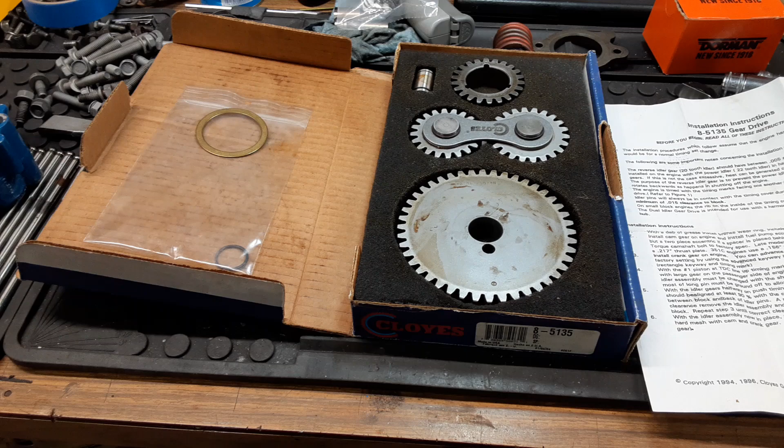Working here now on the Ford 302 60-over Junkyard Dawg engine, and the next thing I'm going to do here is put on the gear drive.

So a lot of you new guys out there, when I say new guys, I'm talking about people who haven't been around this kind of stuff much. This is kind of the cool thing that was done back in the 60s, 70s, maybe even 80s, late 80s, early 90s. It's been proven now so many times, on the dyno, that these things will soak up your horsepower. I wouldn't necessarily say by a lot, but it doesn't help. Let's put it that way.

They're noisy and annoying, and just all the bad and wrong reasons really why you shouldn't put it on. However, I like pissing people off. I like noisy, I like mechanical, I like sounding like I've got a big old supercharger under the hood, a Whipple charger or whatever. That's what I like. And I've been around cars with these. I don't know if you have. I mean, I hardly see it anymore at all.

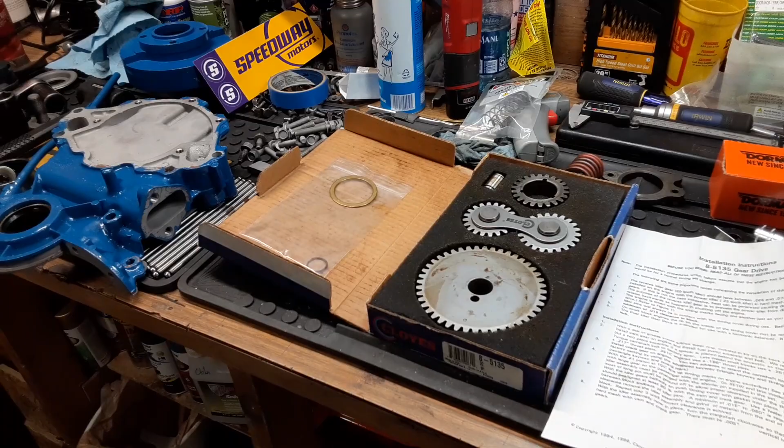Every car show I go to, I don't think I've heard a gear drive for a very long time. Now, the other issue you may or may not know is that these things create vibration, and when you use it on today's modern vehicles, or you're putting fuel injection on here, like I'm going to do eventually, but not when I first start this up — it's going to have a carburetor. The knock sensor, you can really screw it up to where it'll throw out a bunch of retarded timing. It's going to try to retard the timing on your fully computer-controlled electronic ignition system, just because of the fact that you've got a lot of vibration and, quote, knocking happening in your engine, when in fact it's just nothing but a really noisy drive gear.

So anyway, I've had this set for over 20 some years, just lying around. I've always wanted to put it in something because, again, it sounds intimidating. It's your personal preference, but for me, it's cool as shit. I mean it's really freaking cool. That's all I can say. I'm half deaf already, so the fact that I can hear the engine just kind of whining and whirring is really cool.

Now, I'll fully admit though that if and when this engine should stay in the car long enough to actually get the fuel injection swapped over, well then I'm going to put on my true roller, double roller timing chain set. I'm going to put that on there. But for now, because I'm going to drop a carburetor on it, I'm going to drop in a distributor that has an igniter on it, and it'll just basically be straight timing based upon where you turn the distributor, etc.

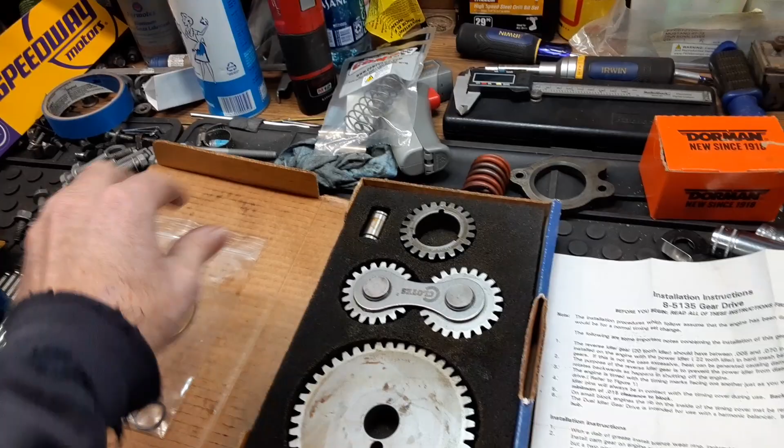Anyway, let's start talking about this. So this video, the intent and purpose is to show you how I'm putting it on this Ford 302, which, by the way, is a C8 block, so a 1968 block, with a 302 crank in it. I'm going to show you how I'm doing it on mine. I'm going to explain a little bit of the unboxing of the actual gear set itself. You won't be able to hear this until I actually get the car started, so if you came here for the noise, I'm sorry, this isn't the video.

But I am going to show you, because I see so many videos out there for small block Chevy, and maybe we can finally make one for small block Ford, so people can actually see how to, and what will happen when it actually fires up and starts and runs, which we hope it will do. So for now...

Let's talk about this. This is a Cloyes timing set, as you can see here on the box. The gear drive, billet steel, heat treated, 3 keyway. The part number is 8-5135. I actually did go to Cloyes' website, they still list it there, but Summit Racing doesn't have it in stock, and it says not available. So I don't know if they quit making it or what, but nonetheless, I have a set here.

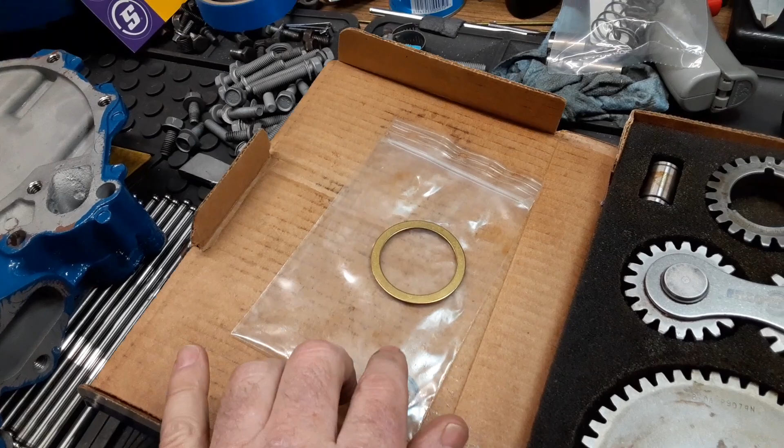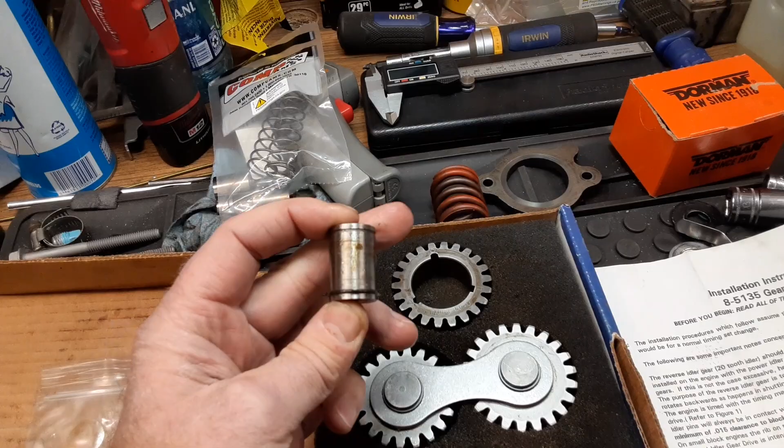So when you open it up, here's a one-page set of instructions that was folded up, and inside this bag, this spring retainer was and still is inside the bag. The bronze thrust washer was inside the bag too, I've taken it out. This is an axle, basically a replacement axle, because you have a choice.

I don't know if you can quite see it with the camera. Yeah, you can see - this is the short axle, and this is the long axle right here. This was over here when I got this set and opened it up for the first time. I've already done a little bit of mocking up and put it on, so that when it's time to do the video I don't have to stop and wait so long. But anyway, the point is that I put the long axle in already.

So about this system, it has a 3-keyed crank gear, and it's really cool because the straight up or 0 timing is the circle, and if you notice the keyway is actually rounded like a circle. The retarded one is the rectangle, and again the keyway is squared off. The advance is the triangle, and as you can see it has a tippy-top looking roof, a triangle point for the keyway. That's really cool, actually. So that is the gear there, the crank gear.

This is your actual gear that transfers between the two. Now, as I said, I had to replace this axle from the short to the long in my situation. This is actually the drive gear right here, the bigger one. The smaller one is basically the kickoff gear, is what I call it, because when the engine is running, this larger drive gear is doing all the work, and when you shut the engine off, sometimes it will back up just a little bit, kind of a kickback, and it will try to throw this drive gear out.

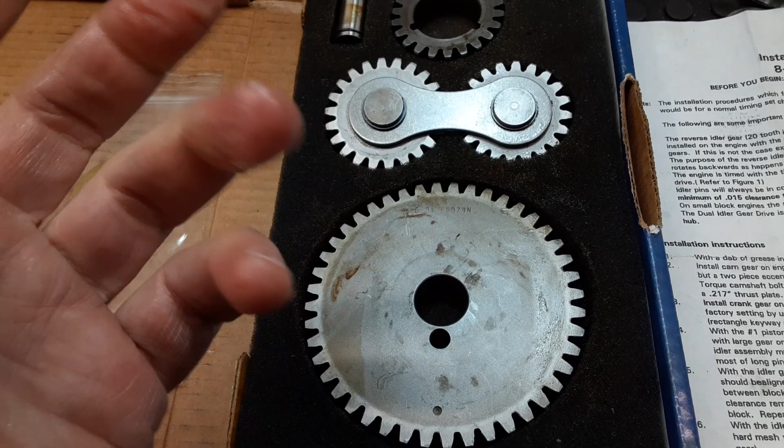Then you have the upper gear, which is very, very simple and straightforward. It has a hole for the dowel and a hole for the cam, that's really all there is to it. There is the dot right there, so the circular dot would line up with the circular crank for straight up, and then you can line that up with the triangle for advance or the rectangle for retard. And it will advance or retard 2 degrees according to this.

Now, I'm not going to do it in this video, but when I get this all together I am actually going to degree the camshaft and make sure that it's close to where it's supposed to be. By the way, in my case this camshaft happens to be a Summit 1790 grind, part number rather. So that's the flat tappet hydraulic - that's what I'm using in this situation.

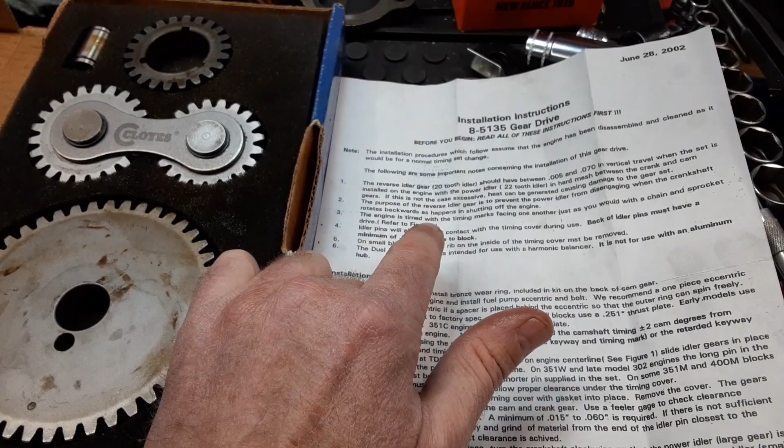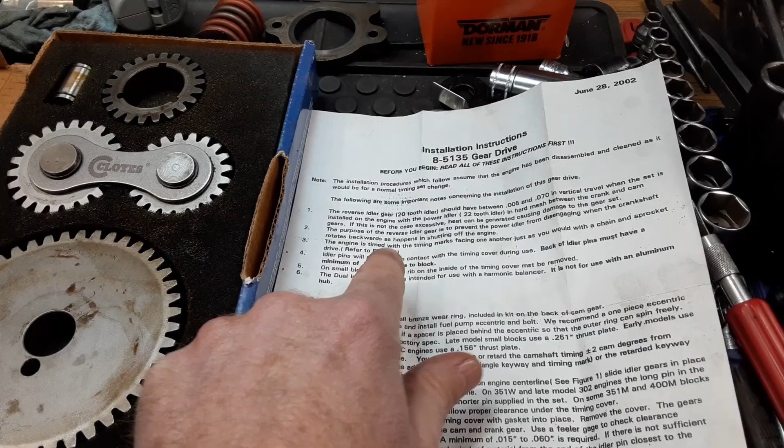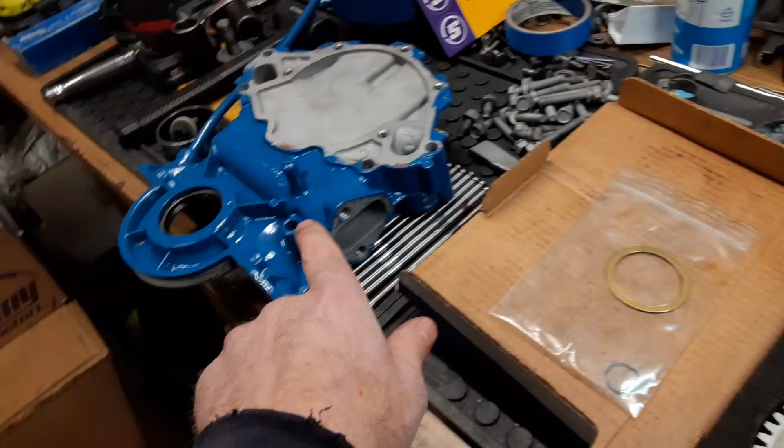Let's see what else - there's instructions in here telling you which one is the idler, which one is the power gear, telling you the purpose, as I just explained. It tells you how to time it as far as how to use the marks. It tells you the minimum clearance that it will need between the pins and the block, which I'll explain here in just a little bit. It tells you what you got to do to the timing cover, which I'm going to show you in just a minute.

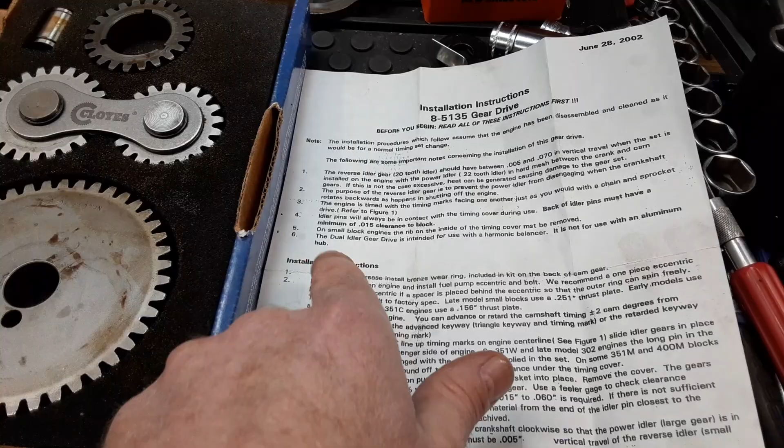It's saying here on the last one, it's intended for use for a harmonic balancer, not for an aluminum hub, which most people probably aren't going to be using unless you're in some sort of high performance racing. So anyway, that's what's going on there.

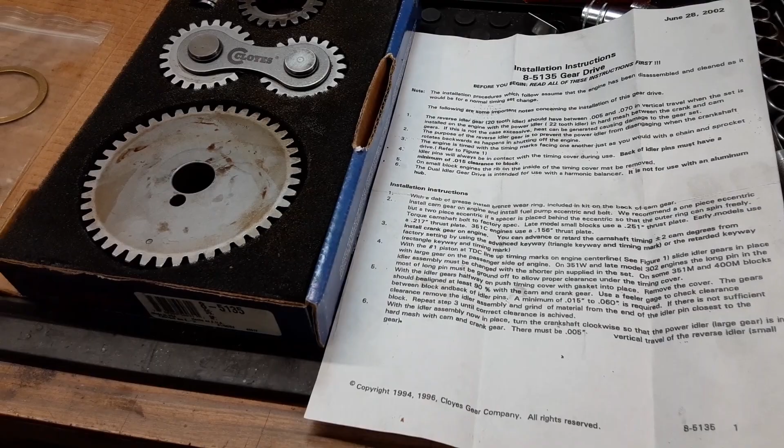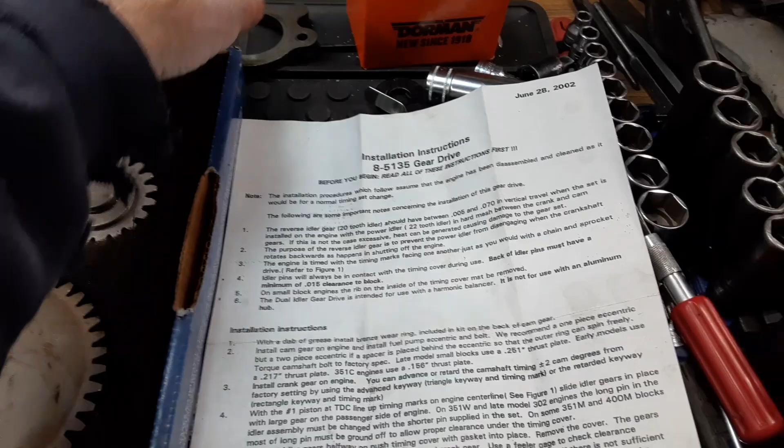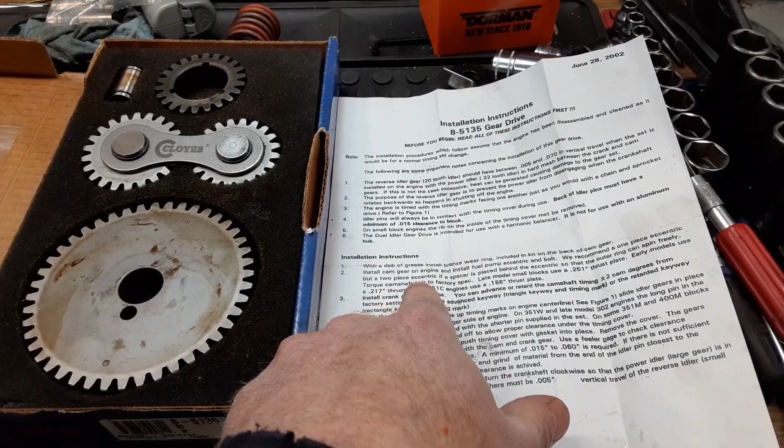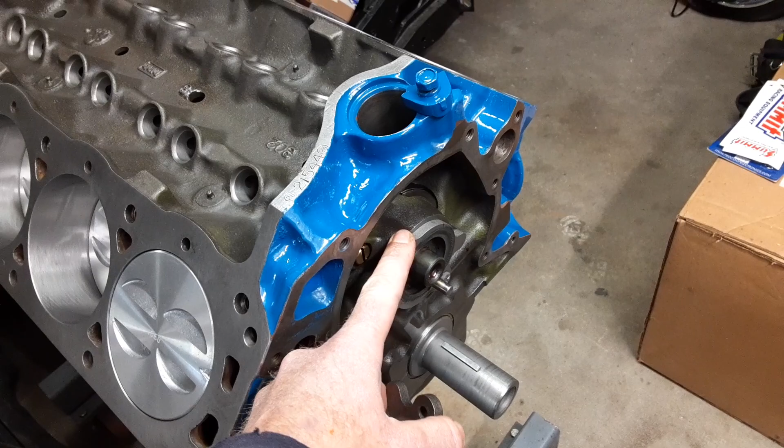Then you have the actual installation instructions, and it tells you this thing will fit on a 351 Cleveland, 351 Windsor, 260, 221, 289, 302, and so on. It's telling you that the thrust plate, the cam thrust plate on a small block Ford, is a certain thickness. The early models are 0.217, the 351Cs are 0.156. In my case, they are 0.251-ish, approximately. This is a good example of one that was used.

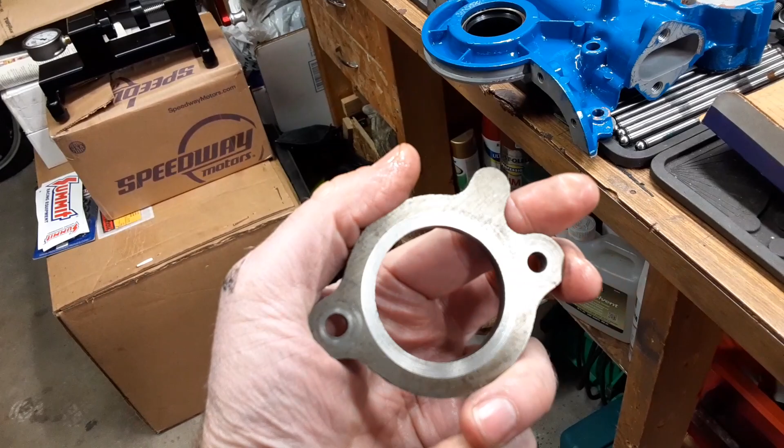You can see that this says bottom and back, so that means it would have been sitting like this against the camshaft, and you can see that it just barely wears a little bit, at least in this particular engine. You can actually see the wear was all happening on the front, where the timing chain was bumping up against this thrust plate. So that is one of the reasons, I assume, why they want you to use this bronze thrust plate, because according to the history we can see here, it's going to rub on the front more than on the back.

Okay, so what I'm going to do is stop the camera here and go piece by piece as we put it back together.

One thing I can do, and by the way, this is in my opinion a lot easier to install than a fresh roller chain type thing, because it just seems to slide right on much easier. I had to tap this on just a little bit, but it was pretty easy, and especially a lot easier for lining up.

So this one here is simple enough, I can do this right now. I'm going to go straight up, which is right there, the nice rounded keyway with a 0, and we'll just slide that right on. Look at that, it just slides right on. There's nothing to that at all.

The next thing we're going to do is put this thrust bronze washer bearing, whatever you want to call it, on the back of this. You can see I already have a little bit of moly grease there, which is what they say to use, a little bit of moly grease, and then we can put that on there. Now I'm going to have to do this with two hands, so I'm going to pause the camera and come back.

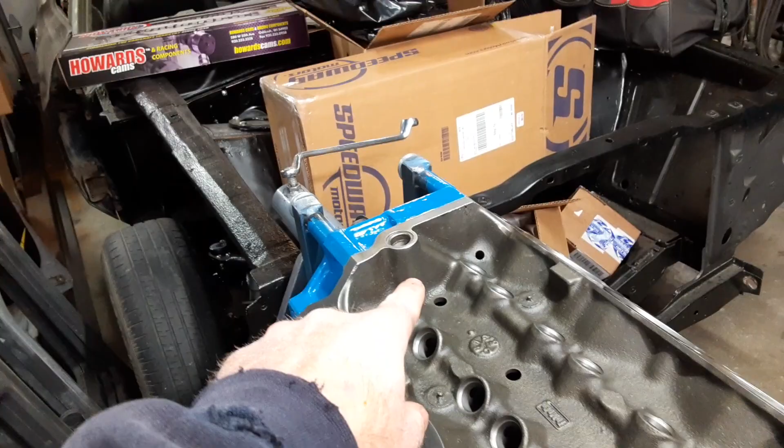Okay, we're back. You can see that I slid the gear on, and like I said, I put some moly lube onto that bronze thrust washer, placed it on there. Then I come over here and put this on. I had to use two hands because I don't have the plug in the back by the cam. I can push the cam basically right out of the back of the block, so I don't want to do that, so I had to hold my hand back there to install this. Okay, so I've got that set in place now.

Let's talk real quick about the fuel pump eccentric. That's what we want to talk about.

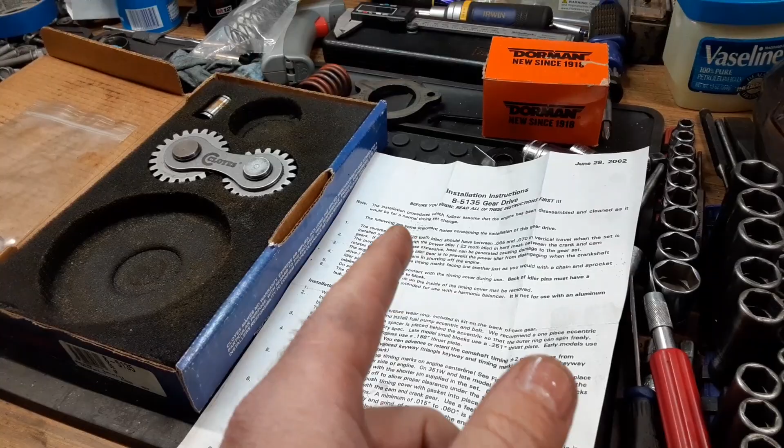Now they're saying in here that they recommend the old-fashioned solid one-piece steel fuel pump eccentric, which I actually do have, so that's not going to be a problem in my case. It says you can use the traditional two-piece or the later style two-piece, but they say you need to make sure you use a spacer on there, so that the inner portion does not clamp against the outer portion to where it becomes basically one piece. You want that outer piece to actually just float around, so to speak.

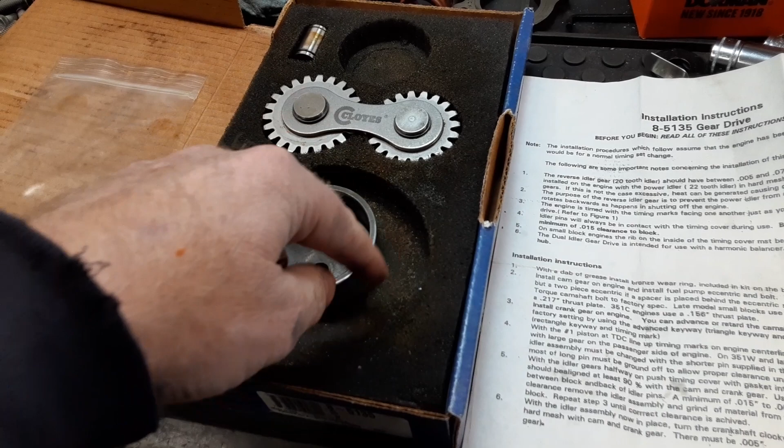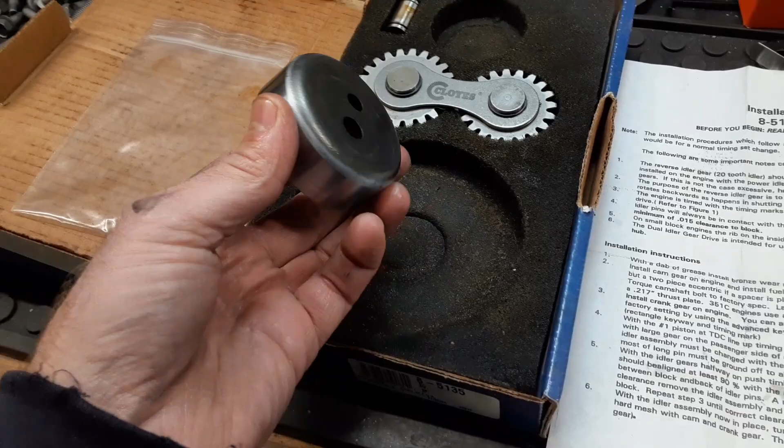You can actually see a little bit of wear was taking place on this, but you can't feel that with your finger or whatnot. But anyway, this is what I actually have, this is what I'm going to use. If I had a two-piece, I would definitely use it, and I would definitely do it the way they say, get some sort of spacer or washer back there, so that when it's all clamped down and tight, the outer ring can kind of flop around and free float properly, okay? Otherwise you just basically have a one piece, and what would be the purpose of that, right?

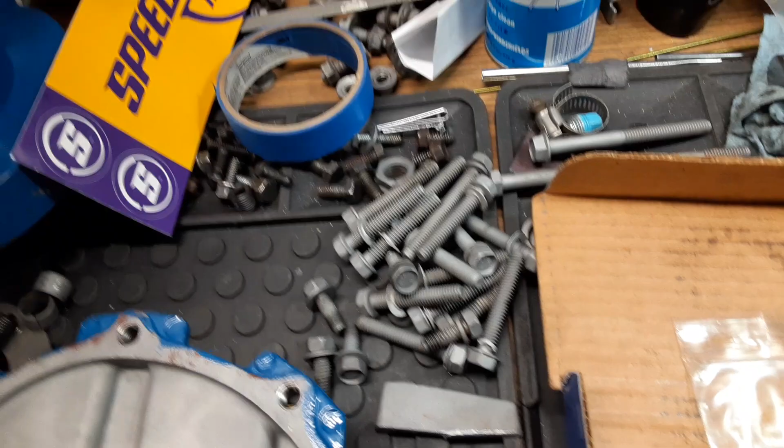Now what we need to do is take the cam nut, or a bolt rather, stick it inside there, get this lined up. I'm going to be using... let's see, which one is it? Nope, not this one, I'm knocking everything over here. This is why I can't wait to get all this stuff done so I can clean this place up once and for all. Taking too much time here.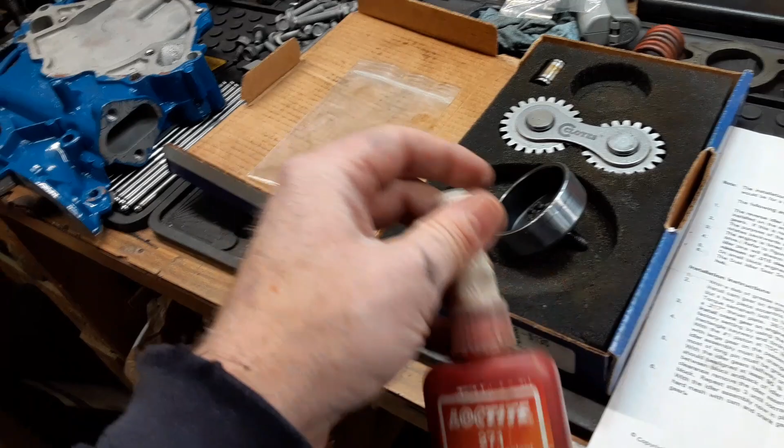Alright, I'm going to use the Loctite 271, put a little bit of that on the threads because I don't want that ever coming loose. Of course you're going to torque it properly, but that's what I use. There's varying opinions about whether you should use Loctite or not. That's what I've always used, I've never had a problem, and when I go to take the cams apart later, if I ever do, no problem. So that's what I'm going to use. I'm going to stop the camera now and perform that function, and we'll be talking again.

Okay, we're back. Let's talk about what I just did here. I used the Loctite 271, put a little bit on the threads there, and screwed this down in there.

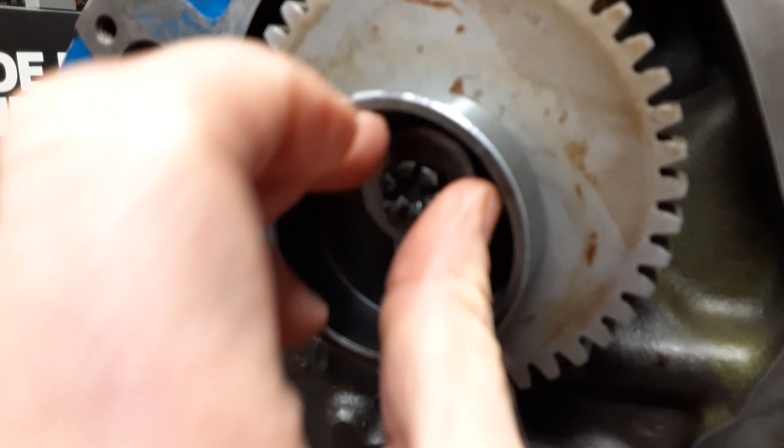Now, one thing I'm going to talk about that I didn't before I started: the fuel pump's going to be located over here, sticking its arm over here like so. This thing's going to be rolling around and pushing on it. When you get this close to being tight, just starting to snug up a little bit, there's enough slack in here that you can rock this thing back and forth surprisingly far - 3/16 in my application here. This thing will slop back and forth.

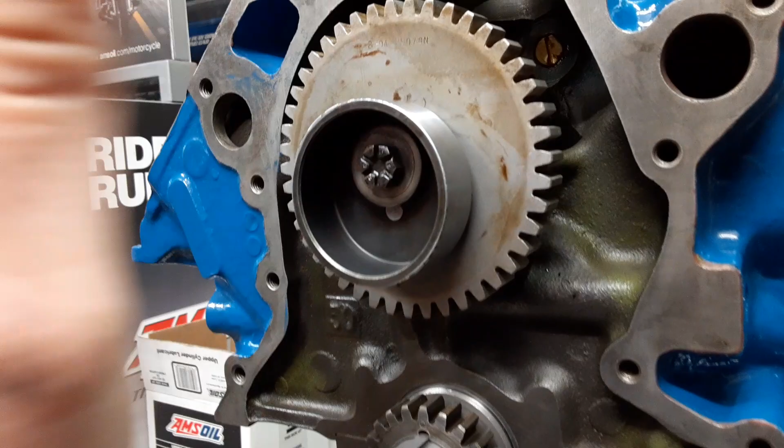So what I did was I rocked this thing tight up against the pin, then tightened this down. That way, for example, if I had it rocked the other way, when it comes over here and hits that pump and starts pumping, it tries to push this backwards a little bit to where it goes back to the pin - it doesn't try to loosen this. I know that might be overkill, but I'm just putting that out there. I just think these little small details are important.

Now, the other thing I did not do here on camera, but I already did a long time ago - I've mocked this thing up already, I'm just showing you how it's done now. Before I did any of the greasing or tightening, I actually mocked this thing up dry, so to speak, because I wanted to check the clearance between that thrust washer and this thrust plate.

Right now I can't move this thing forward or backwards, but it's smooth. The reason it's turning kind of hard isn't that it's dragging, it's just that this assembly lube is cold in here - it's about maybe 55 degrees, and the lube is really syrupy, really grabbing hold of everything. So before I greased everything up, I did a dry assembly and had that thrust washer back against that thrust plate, and pushed and pulled to see if there was any clearance, any clunk kind of situation going on, and there was.

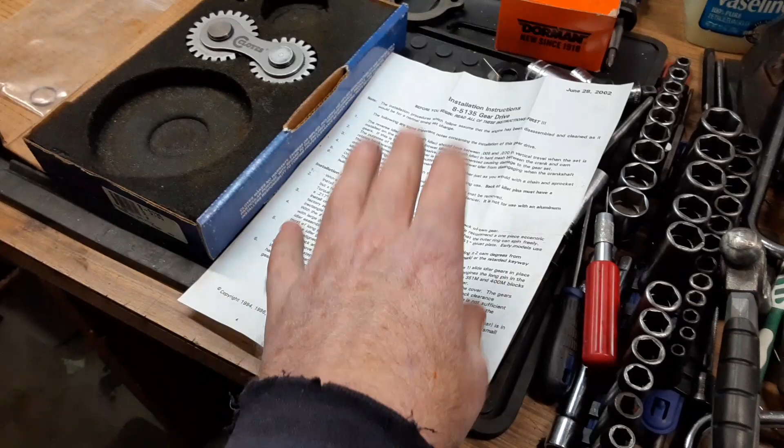So I've already checked the clearance for that, and it had some. Now this over here actually did not talk about that. That's one thing that when you're building something like this, you need to think of - it did not mention what kind of clearance you need between the thrust plate, the thrust bronze bushing, and the gear itself.

It doesn't talk about that, and it clearly says here that you can have several different thrust plates. You can have the 351 Cleveland, which is even thinner than this, and you can have the early model, which I'm assuming means the 221, 260, maybe even 289. It's even thinner yet. I'm not sure what clearance issues you may or may not have with those.

But it just so happens with this 68 block and this .251 thrust plate, it worked and had some clearance. I didn't put a gauge on it, a dial indicator, or a feeler gauge, but to me it felt like at least 3 to 4 thousandths, maybe even up to 5 or 6 thousandths. Right now I really can't get it to move at all, and I can barely feel it in my hands—it's such a small amount with that thick grease in there. I can just feel it has a cushion to it, and it is smooth.

So that's one thing to do that you may not find in here. Now the next step, I'm going to pause it and drop that on, and show you what's going on as far as that mesh.

Okay, so we're back again. Here we are now, we've got this installed on there. Basically, I wanted to be straight up, so I have the 0 notch and the circle—there's the dot right there—so straight up and down. You get these things lined up about as good as you can.

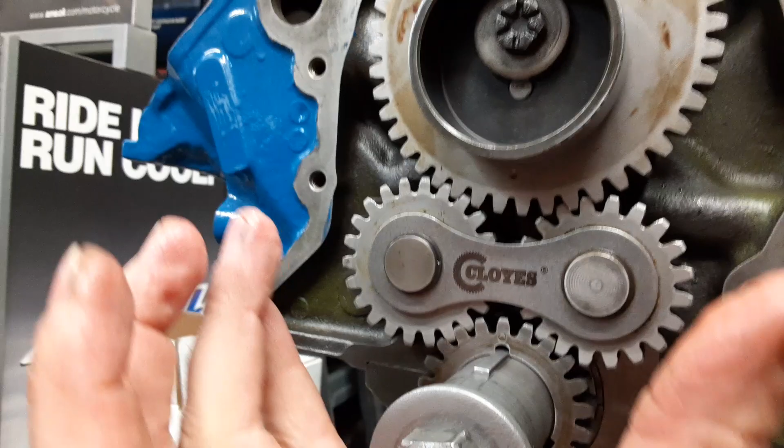What you do is take and stick this on, get it on the crank meshed up as much as you can, and tilt it towards the cam gear. Then I take a plastic mallet and start hammering on it right here, and it just falls right in. It's a bit of a trick—without a plastic hammer it might actually be a little difficult. But once you get that thing to kick just a little bit, it just slides right in there. You can see I can pull it out and push it in.

According to the instructions, these axles will be riding against your timing cover, so there's a certain clearance you have to have between the front of the block and the back of the pins. If you're using the short pins, you have to have clearance for both. If you're using the long pin like I am, all you need is clearance for the one, because this short pin isn't actually touching the block—it's this long pin right now that's touching the block.

According to the instructions, what's going to happen is when this thing's running, the gear set assembly is going to kind of move forward and it's actually going to touch the pin. That's the way it normally is, so that's a normal thing.

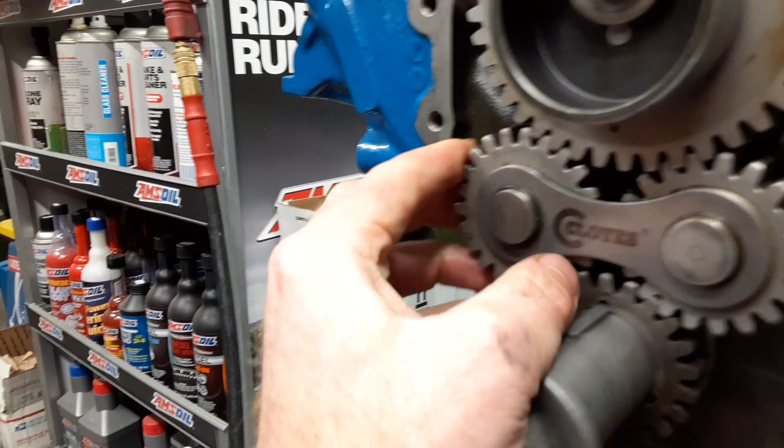Now, the other thing, let's talk about this. You want to get this big idler, or drive gear, to be solid into the cam and the crank, and then you want to check your clearance over here. It's hard to show this in the camera, my hand's in the way, and I'm holding it with one hand—it's a little difficult.

My point is that they say you have to have at least 5 thousandths worth of clearance, or motion. This thing should be able to rock up and down—it's hard to see on camera, but in real life I can see it moving quite a bit up and down. That's all it says: a minimum of 5 thousandths clearance rocking up and down. If it can do that, then your clearance here is set really good.

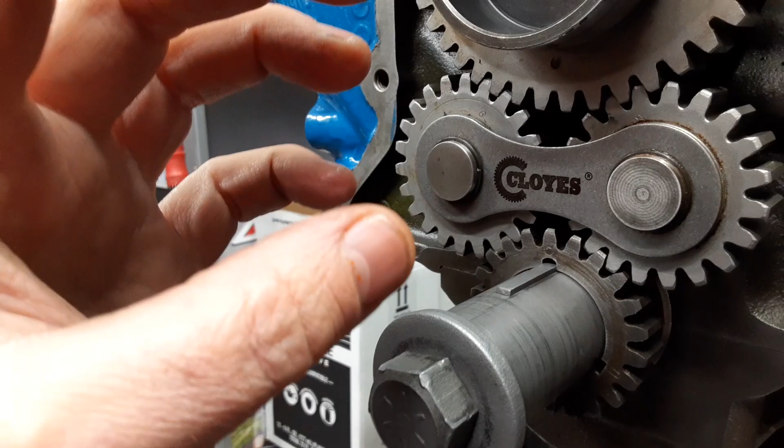The instructions say if this is too tight—even when this is locked in between this gear and that gear, all locked in and nice and tight, and this here is also tight—it's going to overheat the gear set, is what they say.

So you've got to have this clearance over here, because remember, this one here is the idler, the smaller one, and its only purpose is if when you shut this engine off and this engine wants to roll backward just a little bit, it will kick this out, but it's actually going to catch it, because this here is going to hang on. And then when you go to start it up again, it's going to throw this one back in. And then this one over here is just going to be idling. That's all it's going to be doing. Okay, all right, so let's go over here real quick now and talk about the timing cover here.

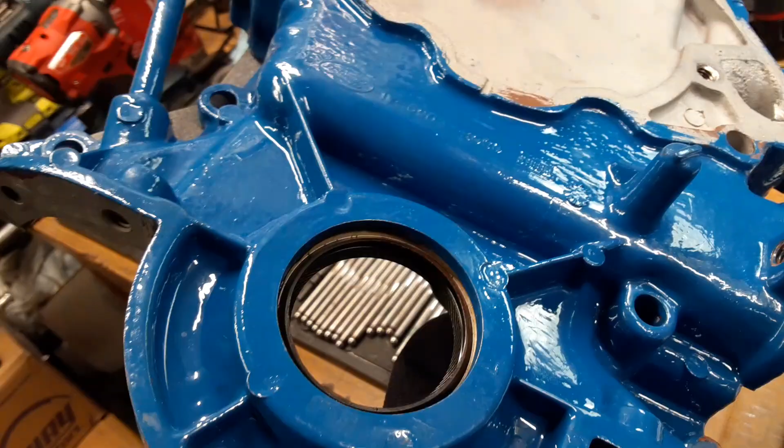So the timing cover has to be modified. This timing cover here is a pretty old one. It has the cast-in nub for the timing. So let's see here, we got a C5, so this is a 1965 kind of part number here.

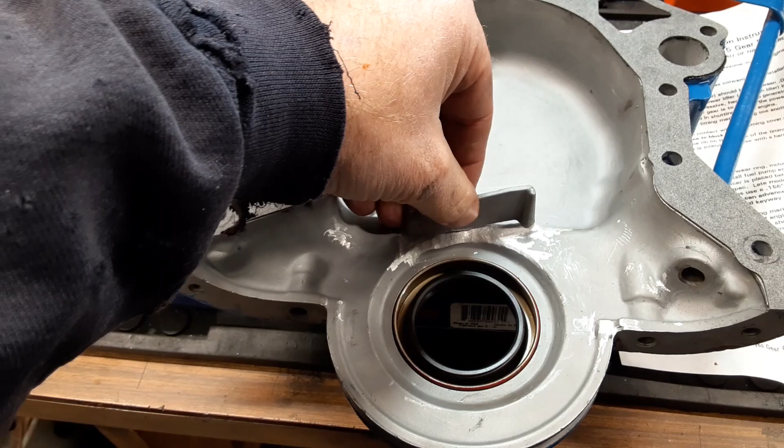And so that's how old this timing cover is. This is supposed to go right there, but you got to get rid of it, so I cut it off. So you cut this off, and I did find that I had to grind. I use a special aluminum type die grinding cutter, and you have to make it flat, you got to make it smooth. That's what I found, because otherwise this axle pin right there will touch up against that right there, and you will not have the clearance that you need for here. Okay, so that's the next thing I want to talk about.

All right, so I'm going to go ahead and put the timing cover on kind of temporarily, and then show you what I mean by that clearance.

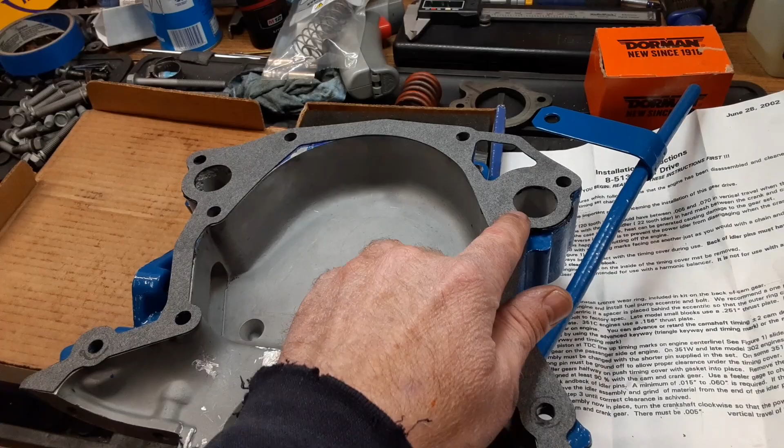Okay, now real quick, just so that you know, one of the things that I did was I put a very thin film of RTV on here, and then I actually took the gasket, I put some studs on here, put the gasket on there, put the thin RTV all over this thing here, and then I took and I placed it on there and just kind of gently clamped it in a few spots, and that way the gasket here would be glued to, or RTV'd to this, and it would be easy for me to take it on and off for trial fitting all the time. Plus, you have to factor the thickness of this gasket for this clearance that I'm about to explain to you.

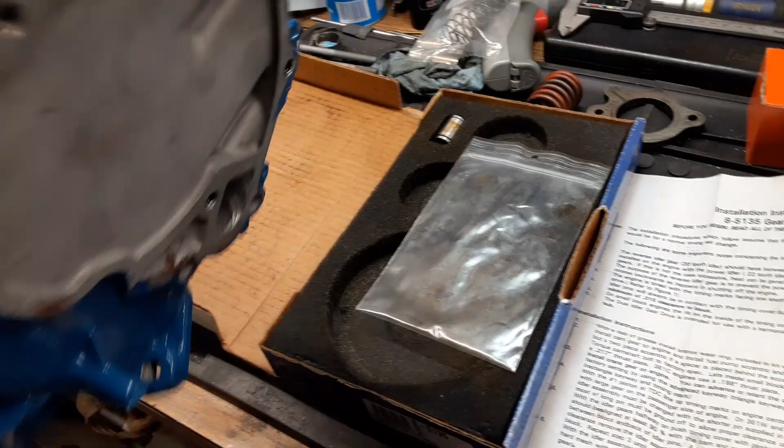Okay, the only other way that you can take away this gasket thickness, for example, if you have that problem of it being way too much clearance, then you probably aren't going to use this gasket, and you probably are going to use nothing but RTV to be able to get it down to a tighter clearance. Now, I'm right on the edge of almost being bigger than what they want, and again, I'm going to explain that over here. And the other reason why you might be asking why I did RTV is because if you look, let's see, there you go.

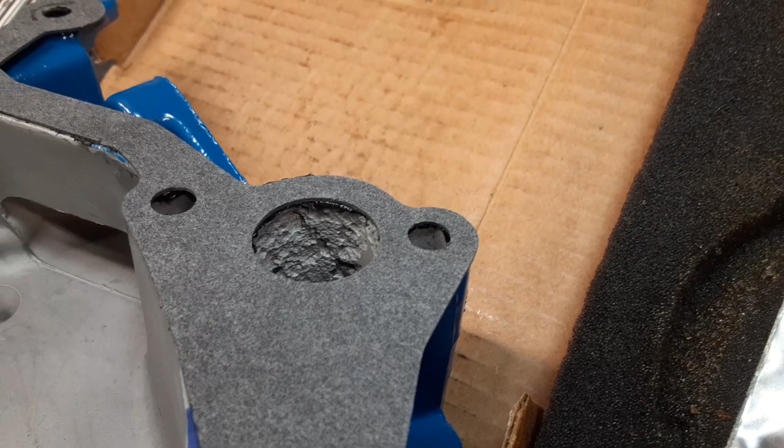If you can look right there, this thing here was rusty, and it did a lot of pitting. And just to make sure that that gasket was going to seal, I did RTV all the way around, and you can actually see the RTV just kind of bleeding out of there. I had to actually take a knife and cut it, so it doesn't cause any blockage or anything. You can see it looks like a nice circle there. But I definitely wanted to make sure it wasn't going to leak.

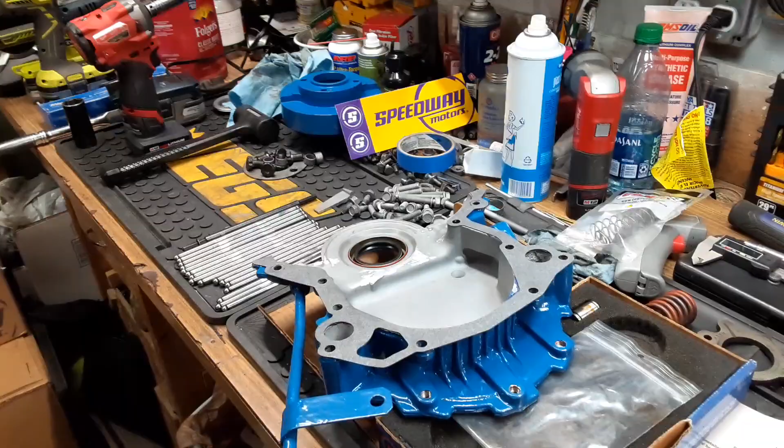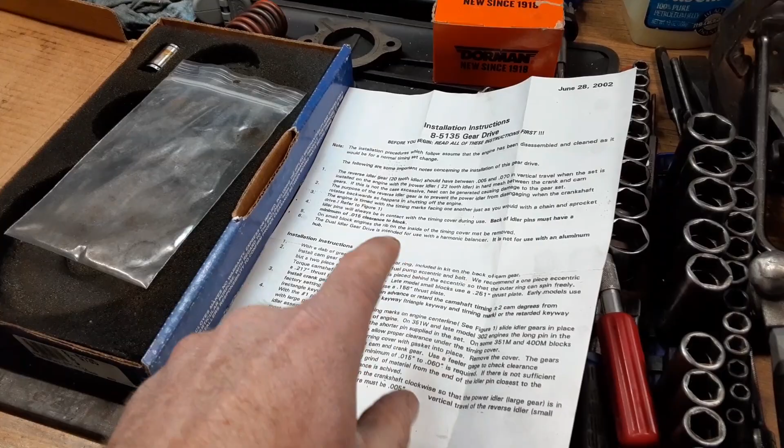Okay, we're back again. Now let's talk about the most important clearance that you're going to be dealing with inside of this engine, or any engine really that uses this kind of setup. Okay, and that is going to be the drive pin clearance, particularly in my case because my drive pin is longer than my idler pin. But if I were to use the short pins for both the drive and the idler, then you could be dealing with this on two different sides, okay?

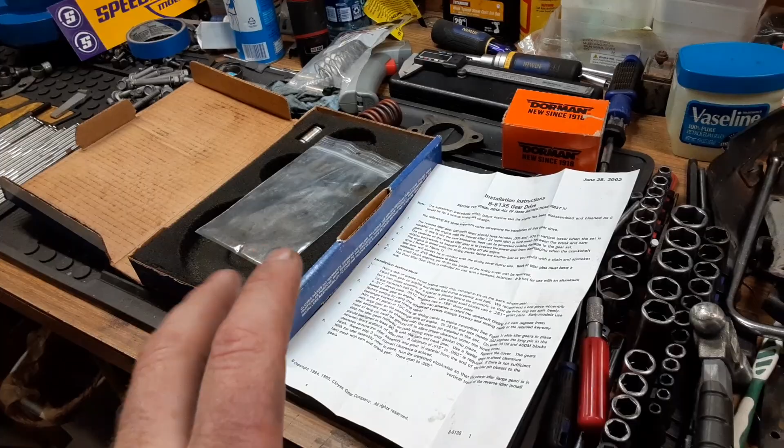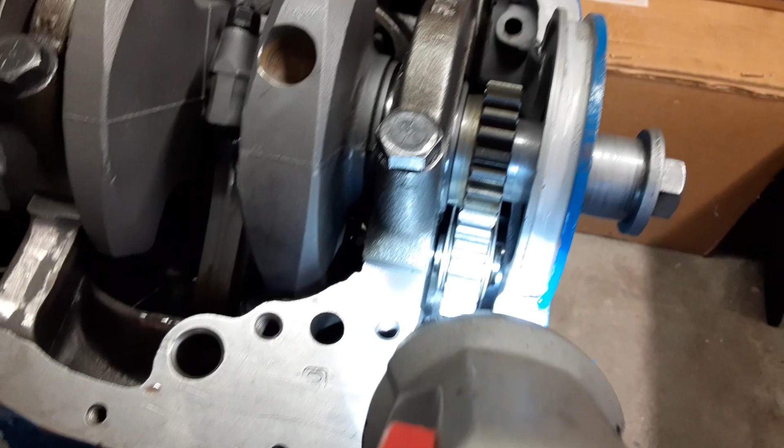But because I have a short pin here, let's see if I can get a light so you can see it. All right, so there's the idler right there, there's the short pin. You can see plenty of room there on up against the block and up against the timing cover as well. Now over here on the other hand, you can see a little bit of clearance. Let's see there, right there. And then you cannot see how much clearance is over there because it's kind of hidden behind this cast piece of the boss for the main right there.

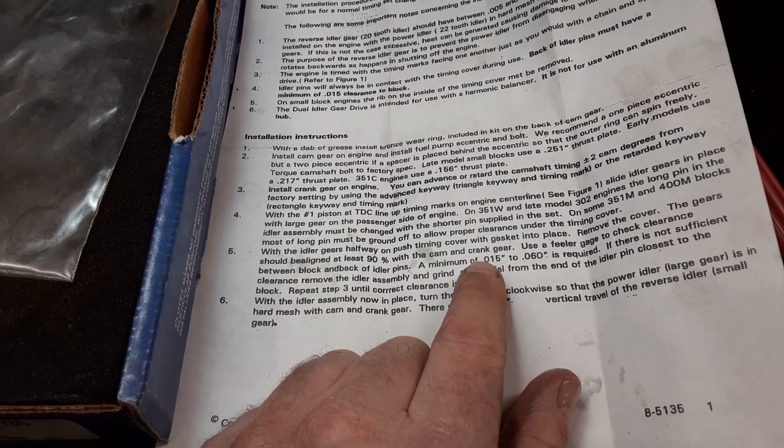Okay, so what this thing says basically is you want a minimum of 15 thousandths up to 60 thousandths of clearance between the drive pin, or the longer pin, or both pins, whatever the case, between the pin and the block. That's where you want it.

So basically what it means is if you were to push this thing all the way forward to where those pins are up against the timing cover, according to the instructions, that's where they're always going to ride. If that's the case, then your clearance is going to be back here, and you want at least 15 thousandths worth of clearance between that pin, when it's up against the front of the cover, and the block, because as this thing heats up, it's going to expand.

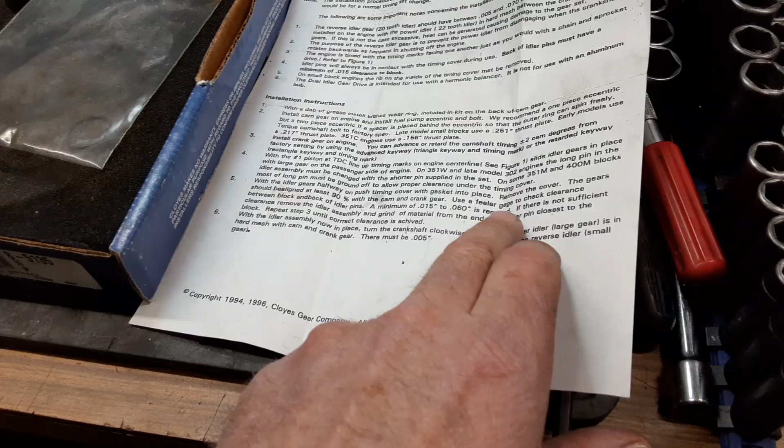That's what they're saying. Now you can have up to 60 thousandths of clearance, is what they say. So that's kind of the max that's required. Minimum of 15 to 60 is required. So when I read that, I say, well, that means if it's more, it's going to be okay, right?

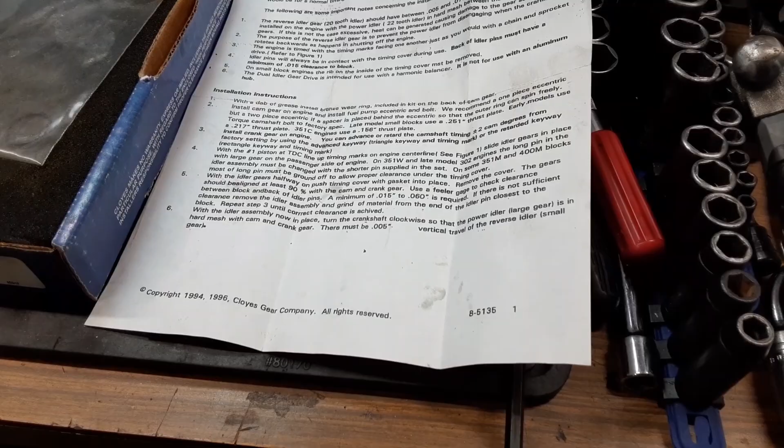That's what I say. They also say they want at least 90% of the actual gears running in line with each other. What they mean by that is they want this gear to be in line with that gear and to be in line with that gear. So this thing starts floating around, see, like this.

I can push it out here until it goes up against the timing cover. And if you'll notice, it's not quite perfectly in line, but at least 90% of the gear is actually still in contact with this and that, right? So that's the important thing.

This is where you really got to pay attention. Now, I actually did put a feeler gauge in, and there's no way to get a feeler gauge back here to tell if you've got 15 to 60 thousandths worth of clearance. So what I did was I pushed it back against the block, and since I got a nice accessible and flat surface here, I stuck the feeler gauges there.

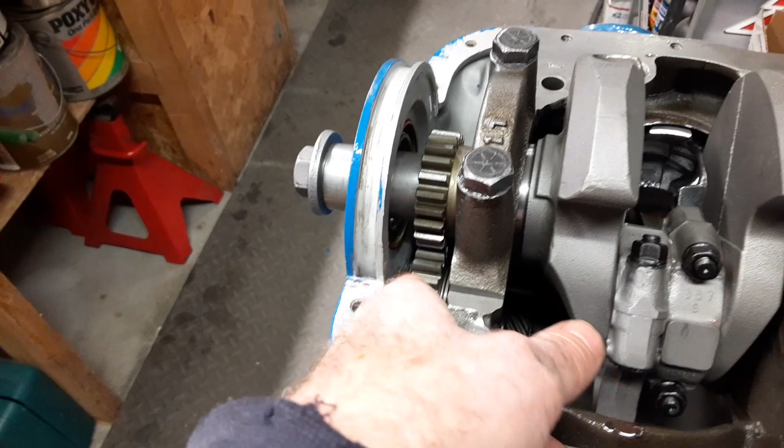And I put in 60 thousandths worth of clearance, and I will have to tell you, it was a sloppy 60 thousandths. In other words, I didn't have any more gauges really, or I was actually too lazy to take the whole thing apart and build a pack of gauges. But I think I got about 70, maybe 75 thousandths worth of clearance.

Remember, this is the junkyard motor. I'm just looking at this based on my experience of what I've dealt with in my lifetime. If this thing comes all the way forward and it's still lined up as much as it is right now, this thing's going to be fine.

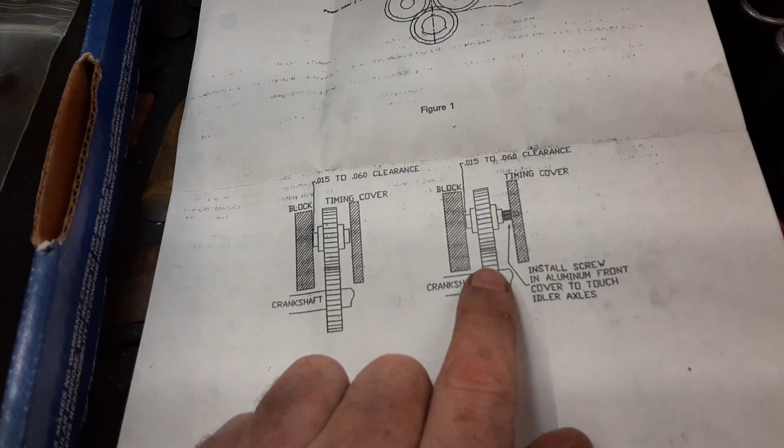That's just my opinion. Now, when you look at the instructions, it has two particular versions of pictures here. Now, this is what I'm kind of doing here. But over here, notice this — this one says install a screw on the front of the aluminum cover. This is one of the pictures for the instructions.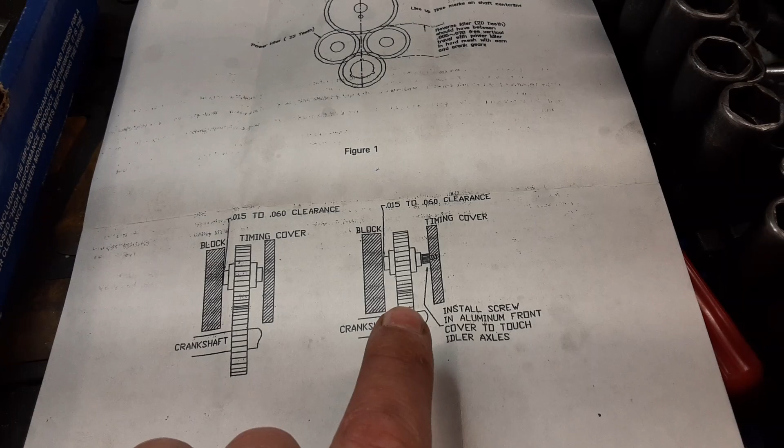It doesn't say — this is talking about that clearance I'm telling you about — but it doesn't really say when you have to do this. Nowhere in the instructions does it say go with this one if this, or go with this one if that. I don't see that anywhere.

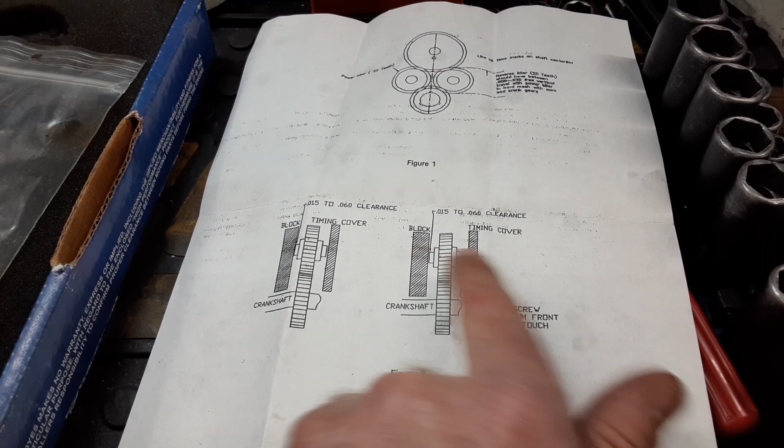So I'm assuming what's happening here is when you get maybe a Cleveland, or you get some situation where you've got a ton of clearance up here in the front, like it's just sloppy, and that drive right here is going to come way too far forward, and it's going to be riding on half the gear or even 75% of the gear, then I'm assuming that's what that picture is all about.

Is that you have to actually find yourself a spot, drill a hole here, and install a screw with a certain size head on it to, once again, finally get yourself to where, when that screw's in place, it's all said and done that you have at least 15 thousandths to 60 thousandths of clearance between the pin and the block. That's what I'm assuming those instructions are saying, because they do not actually say when to use the left side, when to use the right side. Okay? So...

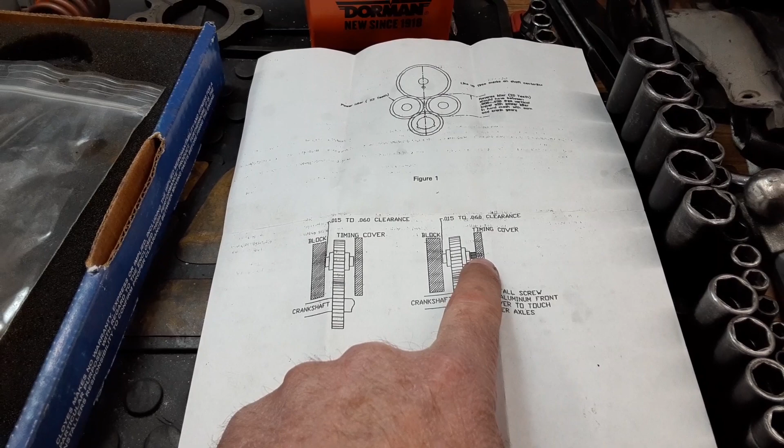I was actually thinking a little bit there for a while that, hey, maybe I should put a steel screw in, because the pin is capable of actually rolling freely, and it will rub on the aluminum timing cover.

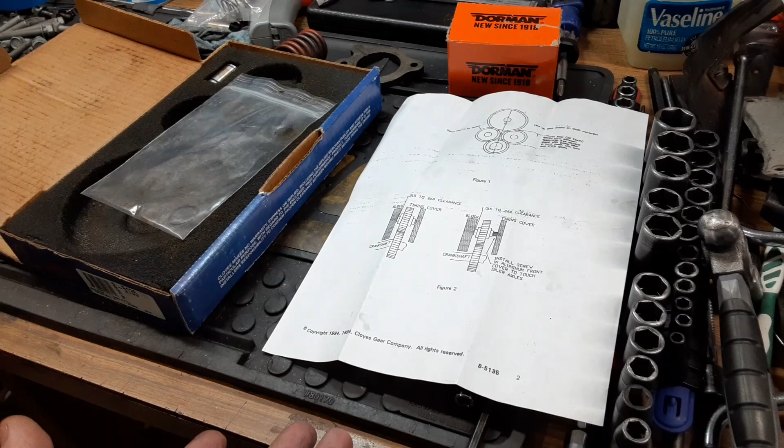But then again, the instruction says it will always do that, so since it always does that, I'm assuming they have examples out there where this is always happening with no problems. Plus, you've got oil spraying around all over inside there at all times. I don't know, I'm just not worried about it.

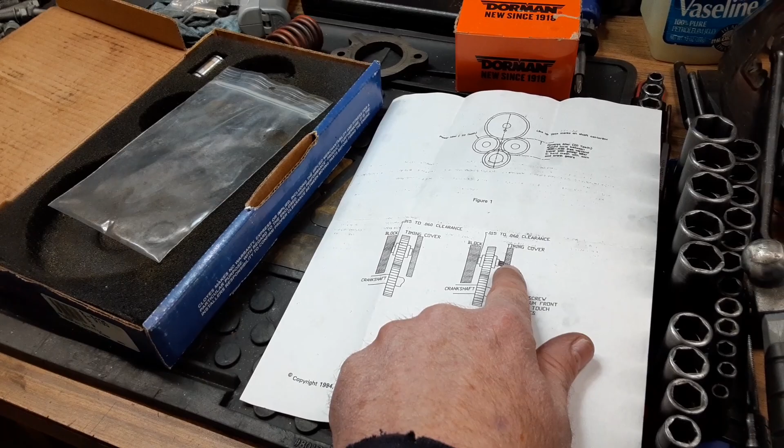The main thing that stopped me, honestly, is trying to figure out what kind of screw head I'm going to find that, when I put it in there - because even if I push this all the way back and stab a screwdriver in there until it hits the block - fits in there nice and flat and is thin enough to allow that 15 thousandths minimum clearance. I don't know what screw that's going to be.

That's the biggest holdup as to why I'm not actually putting a screw in here, because I think I'd have to grind away at that screw, but that's going to weaken it, and the screw head could possibly break off and fall out after this thing starts slamming or rubbing against it.

I don't know, but based on how much surface area these gears are lined up, I'm going to call that 90%. Yeah, it's definitely 90% on the gears. This is definitely more than enough clearance. You can hear it clicking, right?

But even though it's clicking back and forth, according to this, when it starts up it's going to come up out there and ride up against there. The pin itself really shouldn't be spinning - it's the actual gear that should spin on that axle pin. Because if this locks up onto that pin and it does start spinning, not only will it wear a hole in there, it's going to do a lot of damage to these tie bars.

Back onto the subject, I could take off that gasket, and that would close up this gap here and probably give me under 60 thousandths of clearance. But based on the fact that I'm maybe 10 thousandths over that, I'm not concerned at all. I'm going to keep that gasket on there, and this is how we're going to run it.

So there you go - this is and has been a review of the Cloyes 5135 timing set gear drive. It is noisy, by the way, and we're going to find out just how noisy, how to set it up, and how to get it installed onto your small block Ford. Your application may be different though, because if you've got a Cleveland, a Windsor, a 289, or something else, it could be totally different. But this is what happened with mine. This is how easy it was, even though there were some things I had to think about. But it was pretty easy - it went on rather effectively.

Now we're going to have fun actually starting it up and running it, hopefully by this summer. So there you go, that is the review.